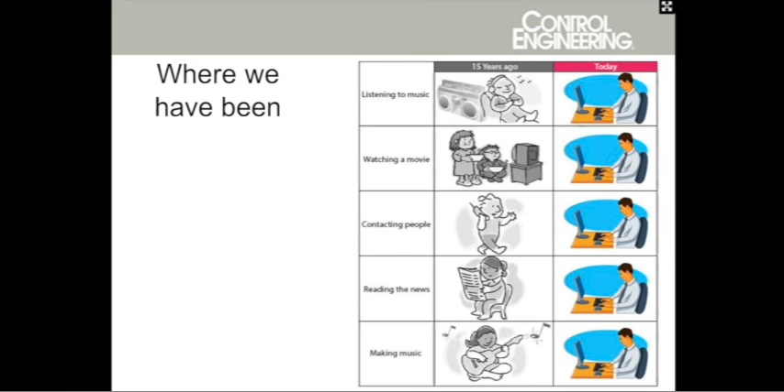Contacting people has changed. Skype is the obvious example. We depend on the internet. Reading the news, our cities' newspapers have completely disappeared because people read all of their news on the internet. Obviously, there have been changes there as well, and even in making music, not just listening to music.

But moving to the next slide, I'm here to tell you that there have been some markets where the internet has had no effect whatsoever. Early in my career, I worked as an expert systems developer, building artificial intelligence systems to automatically debug various broken systems. And this was one of the biggest projects I ever worked on in those days.

It's a Modicon 584 you're looking at. Modicon was a company that made programmable logic controllers, or PLCs. PLCs are used to drive discrete manufacturing processes. Our example was a General Motors plant that made brake linings in Michigan. Modicon doesn't exist anymore—it's been sold, sold several times, and is now part of the French company Schneider Electric.

The interesting thing is the way you used it in 1980, shown in the diagram next to the steel-looking Modicon 584 case on the left. That's a ladder diagram, and it hasn't changed—that's how you do it 35 years later. The machine looks different, with plastic sides now instead of metal, but you program it the same way. There have been changes in computing technology in 35 years, but not many changes in that box or in how you use a PLC to drive a discrete manufacturing line.

More dangerously, in 1980 if you wanted to take information from a PLC and connect it to your information systems—connecting operational systems to information systems—you typically had to print it out, carry it across the factory floor, and type it back in. In those days we called those systems manufacturing resource planning systems. Today we call them enterprise resource planning systems, like those you get from SAP, Oracle, Microsoft, and so on.

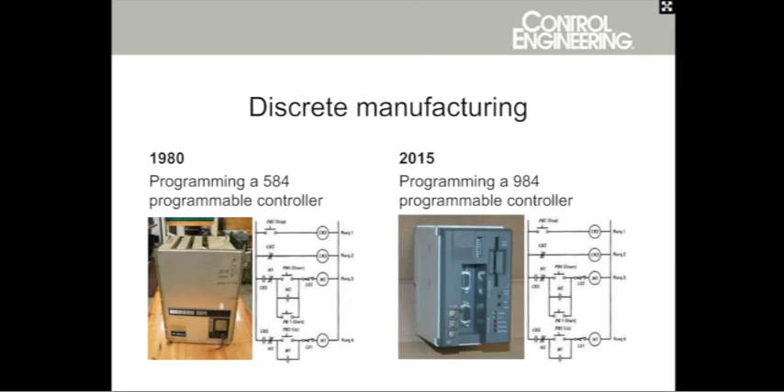Let me give you another example: energy management. In 1950, energy grids were designed with the assumption that there were tens or hundreds of millions of energy users, but only a handful—dozens at most—of power generators. You didn't need to pass information on the grid itself because information was all one-way anyway, so what information could you possibly pass?

Obviously, energy grids need to change. The three grids in the United States—East, West, and Texas—have basically not changed; they still don't pass information. Yet the way we generate electricity has changed tremendously. We generate power on rooftops, from aeolic systems (wind generators), from thermal generators near volcanoes and earthquakes, and from tidal generators along the coast. But those sources don't have the consistent output of typical nuclear, coal, or gas generators, so we have to change the grids to deal with that—but we haven't.

There have been lots of experiments to build microgrids, but it hasn't happened yet. Worse, the information we need to pass around the energy grid to make those changes live doesn't exist on the grid itself.

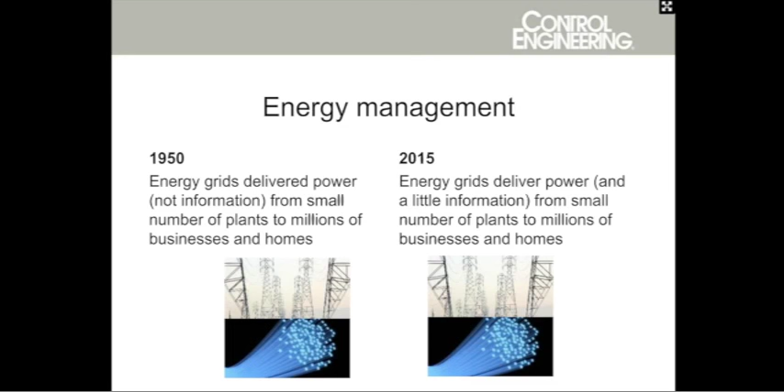Moving on to the next slide, in aviation—one of my favorite examples, because I'm a bit of an airplane nut.

Most of you may have heard that jet engines collect information while they're in flight. They can land with many terabytes of information that can be used to figure out whether they were performing at peak performance, whether they can be made more efficient, how much fuel they use, whether there's a bent fan blade in the second stage compressor, all sorts of information.

You'd think that since every airport in the world has Wi-Fi, the airplane would simply connect to Wi-Fi after landing, upload the engine information. That would go directly to the engine manufacturer, whether it's Avic or Rolls-Royce or Pratt & Whitney or General Electric or CFM or whomever. They would then benchmark that data, big data, against the use of that engine on that wing, on that type of airplane over the last 40 years, and say, you know what, this engine's about to fail, or maybe we can make it more efficient if we go replace one fan blade, or maybe we need to change the fuel mix. In fact, none of that happens.

Although there have been instrumented engines since 1950, still here in 2015, if you want to get that instrumentation information off the engine after the plane has landed, somebody's got to stick a USB key or a cable, more likely a cable, into the engine, download the data, look at it maybe at the end of the shift and see whether some of it ought to be sent up to the jet engine manufacturer. The engine manufacturer, perhaps at the end of the week, might run against benchmarks and say, oh my God, we better go find N5227 because it's about to fall out of the sky. 65 years, no change.

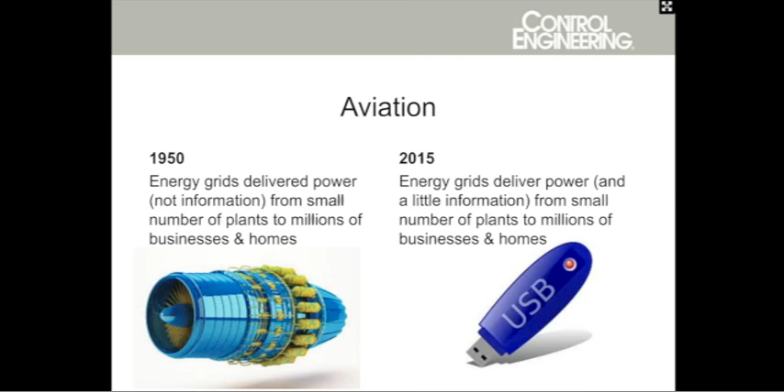Obviously, there are some changes we can make here. Moving on to the next slide, I see this as a transition very much like the last two revolutions.

In the late 18th century, we had the Industrial Revolution. The Industrial Revolution featured the move from human brawn to machine brawn. There was, of course, a social disruption that came with that, as people were kicked off the looms and replaced with steam-driven looms, and then later internal combustion engines, and then later electric engines. That's what led to the Luddite movement, especially in the textile business. People who had been cast out of their jobs or would soon be cast out of their jobs, destroying those new electric looms and complaining about it.

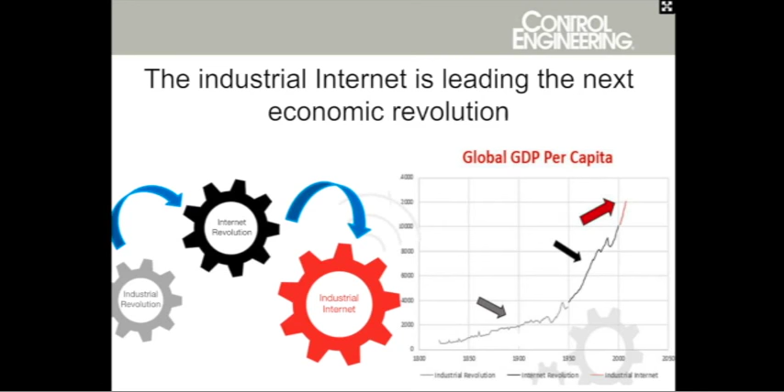What we're specifically looking at is disruptive technologies to lead transformational change. There will be social disruptions. Disruptions that cause transformational change cause disruptions in the way societies are organized. Clearly, we're going to see, for example, in a world of self-driving cars, especially when the self-driving cars talk to the roadbed and talk to each other, we're going to see a world in which taxi drivers need to find a new job. That's what we mean by disruptive.

That kind of disruption makes changes that change the world. But that's our job, is to find those transformational changes and make sure that we can make those transformational changes without destroying our own industrial basis.

In the next slide, we map out the difference between what we call the industrial Internet and what we call consumer IoT. So the Internet of Things is a basically simple idea. It's the idea that we take information from thousands, tens of thousands, potentially even millions of sensors worldwide. We integrate that information and we run it through big data. That is, we do predictive real-time analytics on that data and see when something can be made more efficient. And we take that back out either to human beings or, ignoring human beings completely, go directly to actuators positioned around engines or power generators or anything else that's manufactured.

So we're not talking about Fitbits, we're not talking about shopping carts, we're not talking about self-driving cars. While those are important markets, our focus at the Industrial Internet Consortium and what we call the Industrial Internet of Things is in transportation, it's in manufacturing, it's in electric power generation, distribution, and transmission, it's in oil and gas exploration, distribution, and so forth.

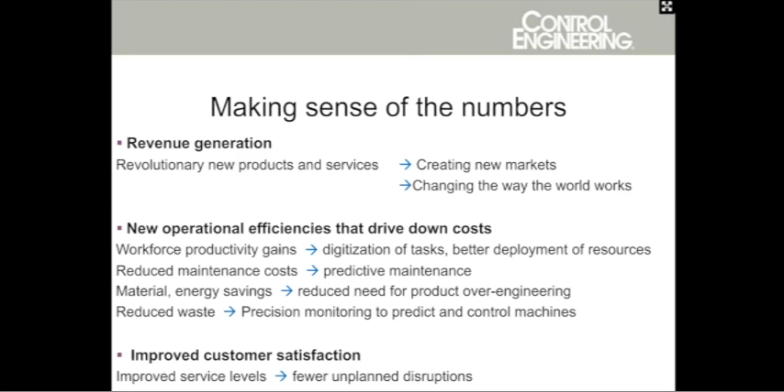So how do we get to this beautiful world? I hate presentations in which they say the future is so bright we're going to have to wear sunglasses. So I won't say that. But I will say, to get to that future where we have products that no longer fail, we need to have all these different players, as I show in the next slide.

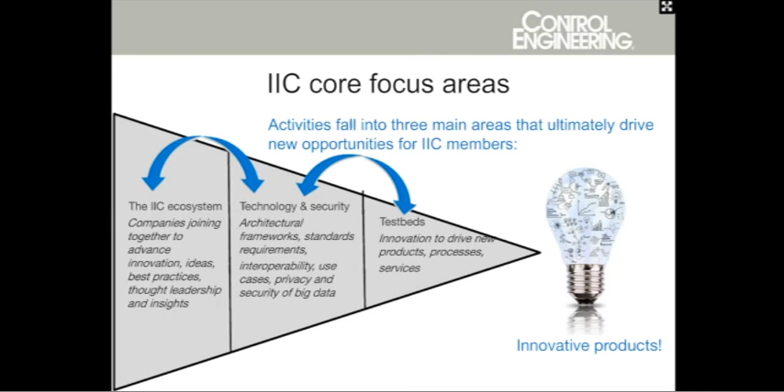As you see in the IIC core focus area slide, the net result is, we hope, and we're pretty sure we're going to get to innovative products. In fact, our first test bed has already had some positive results.

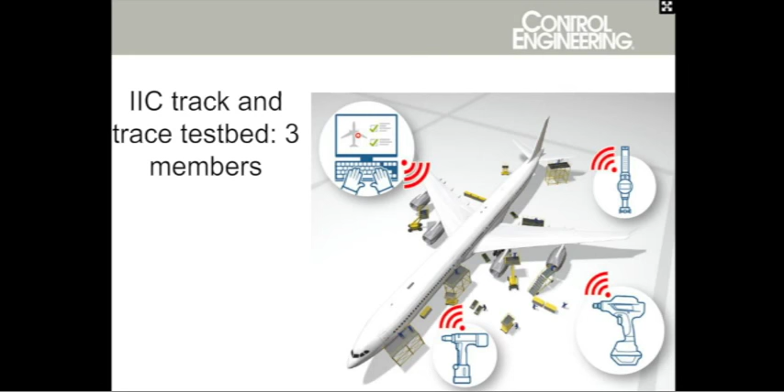In the next slide, you see the IIC track and trace test bed. 3 primary companies have driven that, especially a German manufacturing company, an American connectivity equipment maker, and a large Indian systems integrator. Built a solution which we call track and trace. It's quote, only a demonstrator, unquote, but as I say, we've already had some positive results. Moving on to the next slide, the IIC testbed track and trace.

The idea of this track and trace testbed was quite straightforward. If you can track all of the tools, people, parts, and inventory flowing through a manufacturing site, you can make sure that site is much safer, that people are only using the tools they're supposed to be using and trained to use, to make sure the tool is being used on the right piece of inventory and with the right part, and that the bolts are tightened the right way.

But also you can make your factory floor more efficient because you know the flow of products, inventory, and work in progress flowing through the factory. So you can monitor and control quality and increase quality, and therefore increase customer satisfaction as well.

This two-phase project is actually coming to an end. The first phase is coming to an end today, and already there are results that have generated changes in the way manufacturing is done in some manufacturing sites. It's generated a large open source project that will be carried out by the Eclipse Foundation, a member of the Industrial Internet Consortium. It's also generated important requirements for new standards in how you manage devices in an industrial Internet of Things. Those standards are now being worked on at the Object Management Group.

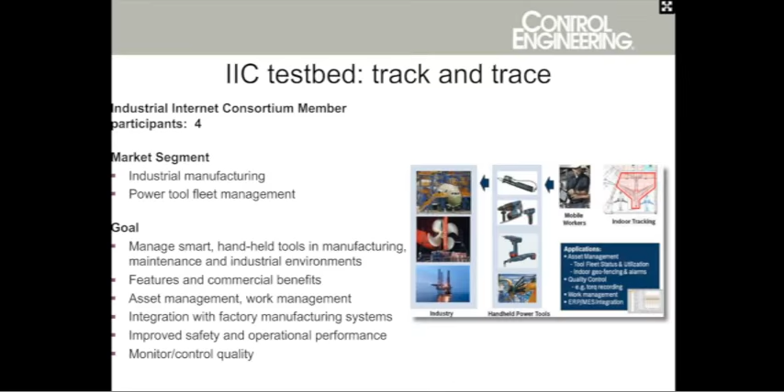We talked about power grids earlier in the presentation, so I won't belabor the point except to say if we had microgrids, we could deal with the varying inputs and outputs of power usage in cities, and the varying inputs of aeolic (wind) sources, thermal sources, tidal sources, and solar sources and so forth. We could share power between grids, move power around as necessary, and have a much more efficient power grid system.

This test bed is under development now. There's a test system being built in Southern California now. If that works, it will go full scale in a test bed in San Antonio, Texas. And there's much more information about both these test beds on the Industrial Internet Consortium website.

Why now? What's driving this is not anything particularly new in terms of technology, but low-cost, powerful technology, low-cost processing power, connected everything, and big data technology, both in terms of integrating large amounts of well-structured data, like engine data, and looking for nuggets of information in large amounts of unstructured data, the way Hadoop does, or Google for that matter. I think we're headed towards a lot smarter machines, not only in smarter manufacturing and smarter products, but a lot smarter data as well.

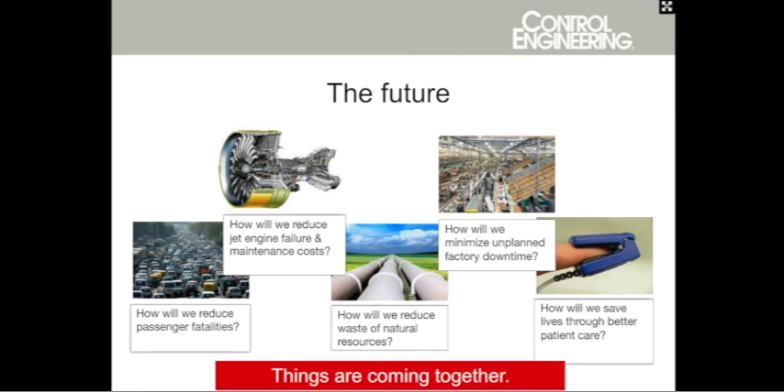I want to leave you with the message that things are coming together. We are getting to the point where we are building test beds. We're learning from those test beds. We are finding new leasing opportunities, new OpEx versus CapEx opportunities, new transformational business outcomes. And we're finding out that the industrial Internet of Things, the Internet of Things applied to industrial systems, is changing the world.

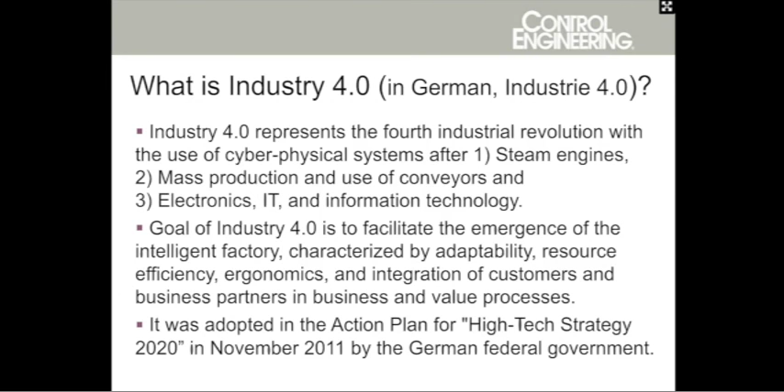There is a governing organization called Platform Industry 4.0, which aims to help those involved actively participate in the fourth industrial revolution, which is the source of the name, strengthen the German economy - it's a German-based organization - encourage development of standards, business and organizational models, and promote practical implementations with an exchange of technologies across industries. The organization also aims to ensure that Germany is a leading provider by 2020 of cyber-physical production systems.

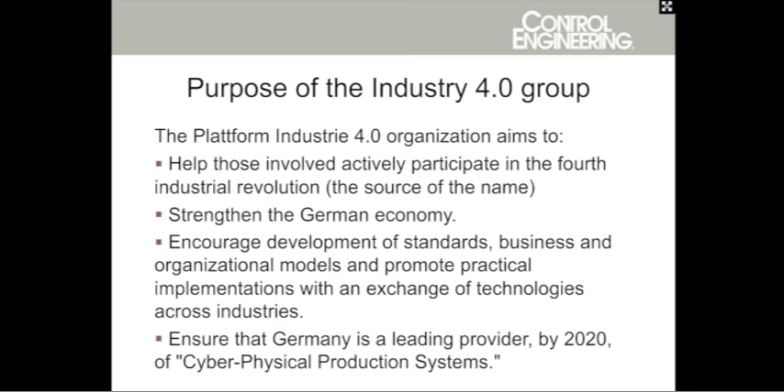I feel a need to pause and briefly explain why I'm giving this presentation, though I'm not associated with the Platform Industry 4.0 group. I met and invited a member of the Platform Industry 4.0 Steering Committee who agreed to speak for the webcast. We changed the date for the webcast, which created a conflict. The organization, which is in an expansion transition right now, was unable to provide a replacement.

Therefore, I used information from primary sources cited at the end of my slides to assemble this presentation, just as I would write an article for Control Engineering or Plant Engineering.

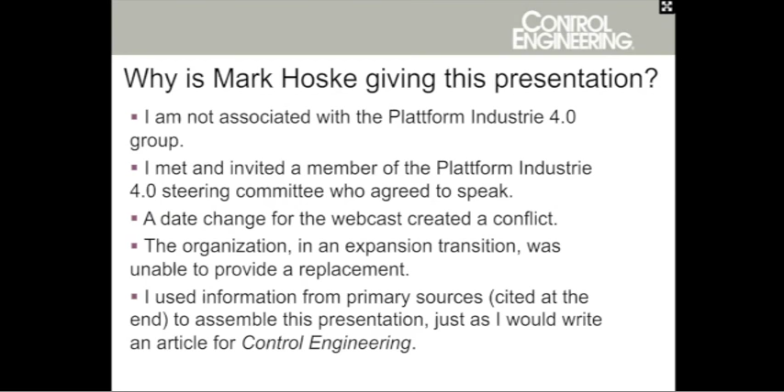Those involved with the Industry 4.0 organization include Bitkom, the German Federal Association for Information Technology, Telecommunications, and New Media, which has about 1,400 members. VDMA, a German federation representing about 3,100 companies. And ZVEI, the German Electrical and Electronic Manufacturers Association, representing the common interests of the electronics industry and related service companies in Germany, with about 1,600 companies involved.

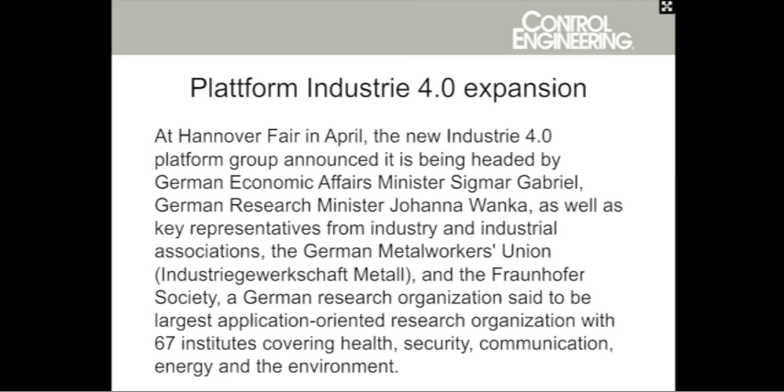At Hannover Fair in April, the new Industry 4.0 platform group was announced. It is being headed by the German Economic Affairs Minister and the German Research Minister, with key representatives from industry and industrial associations, the German Metal Workers Union, and the Fraunhofer Society, a German research organization with 67 institutes covering health, security, communication, energy, and the environment.

The Industry 4.0 platform has working groups covering the following topics: reference architecture, standardization, research and innovation, networked system security, the legal environment, work, and education and training.

Some basic concepts for Industry 4.0 are cyber-physical production systems, which use microcomputers as embedded systems where hardware and software components are integrated into a comprehensive system to implement specific features. The Internet, mobile computing, and cloud computing have the potential to enable greater productivity for industrial processes.

Cyber-physical production systems can be integrated into objects, products, and equipment to exchange information automatically as needed. Industrial processes are not organized centrally, but are decentralized and dynamic using this framework.

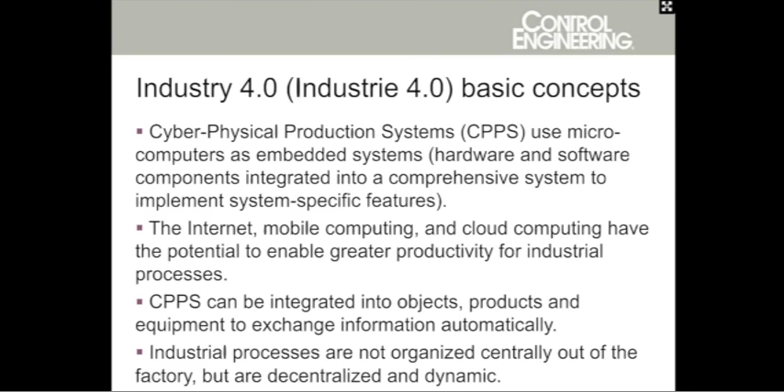Smart objects and machines are used in Industry 4.0. Products embed intelligence and inform machines what to do by using barcodes or radio frequency ID chips, RFID chips, with the appropriate information. Scanners and computers read data, transmit it, and ensure that machines operate properly. Smart objects communicate with each other, creating the Internet of Things and services. The physical world and the virtual world merge into cyber-physical systems.

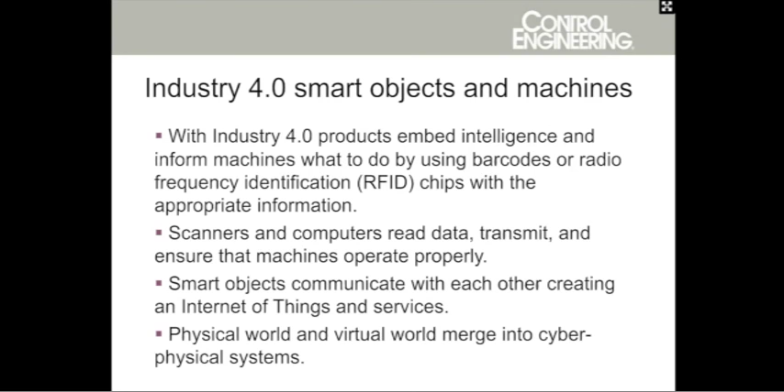In the networked factory, the Industry 4.0 framework enables production logic to change. Also, intelligent machines and products, storage systems, and resources are interlinked through the Internet along the value chain, including logistics, production, marketing, and services, throughout the whole value chain.

Here's an example of how Industry 4.0 can be applied. In the automotive automation area, car components collect data about their condition and indicate when a replacement is needed before failure occurs. The product independently sends a message to the manufacturer that replacement is necessary. The order contains detailed information on vehicle types, what is needed, and where components should be sent for repair.

The factory processes the order. Machines automatically configure themselves so that the right part is made and sent to the correct location at the right time for the repair to occur.

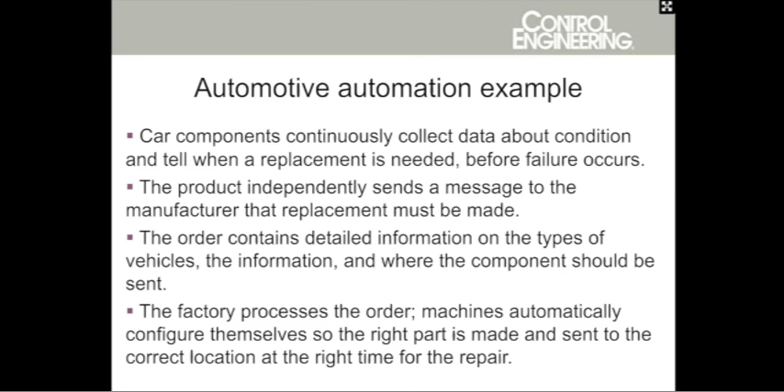Industry 4.0 offers benefits that can be grouped into 5 categories: competitiveness, flexibility, individual or customized production, innovation, and new work capabilities. I'll give some details on each, provided by the organization.

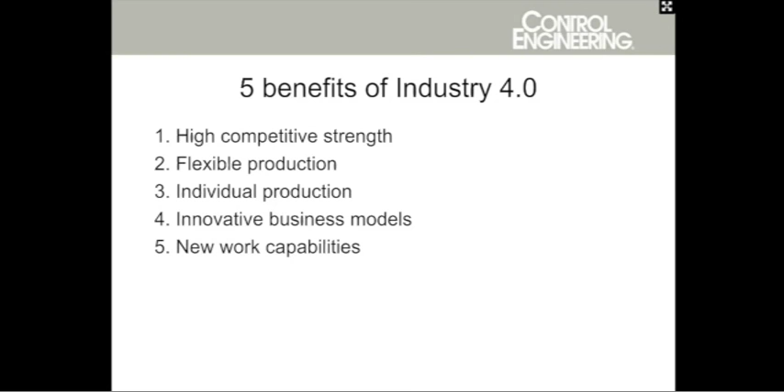First benefit is competitiveness. Germany, the organization says, is said to have an internationally leading manufacturing base, strong in the field of embedded systems. That is enhanced with active support of the transition to Industry 4.0, networking of products and equipment, and the efficiency of manufacturing companies helps promote global competition.

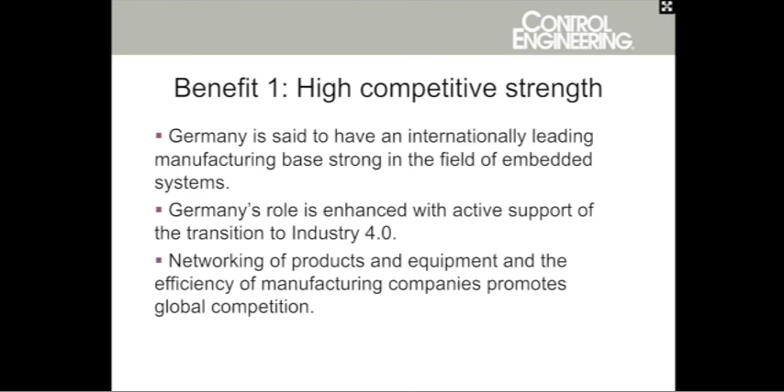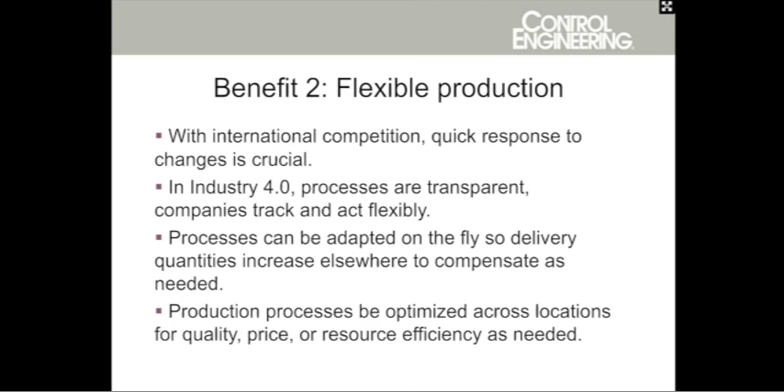Benefit 2 is flexible production, which helps with international competition. In Industry 4.0, processes are transparent as companies track goods and processes and act flexibly. Processes can be adapted in real time so that production matches delivery quantities as needed. Production processes can be optimized across locations for quality, price, or resource efficiency as needed.

The third benefit of Industry 4.0 is individual or customized production, which means production of single pieces and small quantities can be profitable. Goods can be specified on certain machines sooner as needed using information technology. A product might be painted blue or red on the same machine without any difficult reprogramming. Production reacts quickly to individual customer-specific requirements.

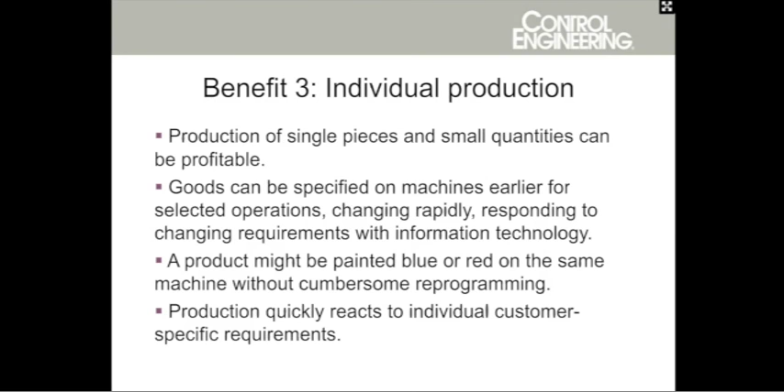The fourth benefit of the fourth industrial revolution enables new business models and services. Intelligent objects collect diverse data, which can be used for innovative services. Startups to medium-sized enterprises with ideas can benefit from big data and more quickly establish themselves with services to offer in their marketplaces.

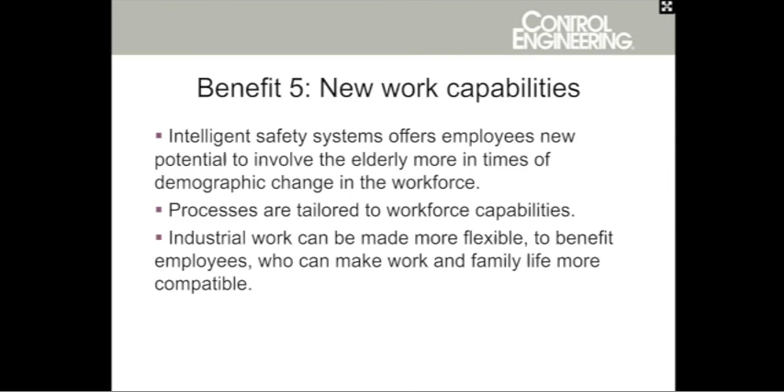Benefit 5: Industry 4.0 will also help with extreme demographic changes affecting manufacturing. Processes will be tailored to workforce capabilities. Industrial work can be made more flexible to benefit employees, who then can make work and family life more compatible.

Examples and advice for implementation. Industry 4.0 can use manufacturing information technologies to create a resilient factory so that production lines and processing stations can quickly adapt to a changing market product mix to optimize capacity.

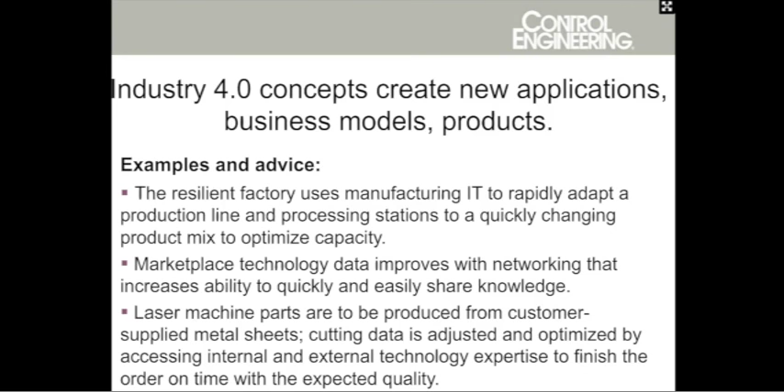Industry 4.0 can improve networking to increase the ability to quickly and easily share knowledge. It can also adjust and optimize part production and processes, such as cutting metal parts with lasers, by quickly accessing internal and external technology expertise to finish the order on time with the expected quality.

More examples might include intelligent maintenance. Costs can fall as predictive maintenance significantly reduces unplanned shutdowns.

Greater use of networks in production helps mass customization, adapting to turbulent markets with flexible production processes. Adaptive logistics: networked production can increase reliable production processes for low-friction, error-free, value-added processes. Even as demands for piece number and variant flexibility increase, bottlenecks and errors can be avoided.

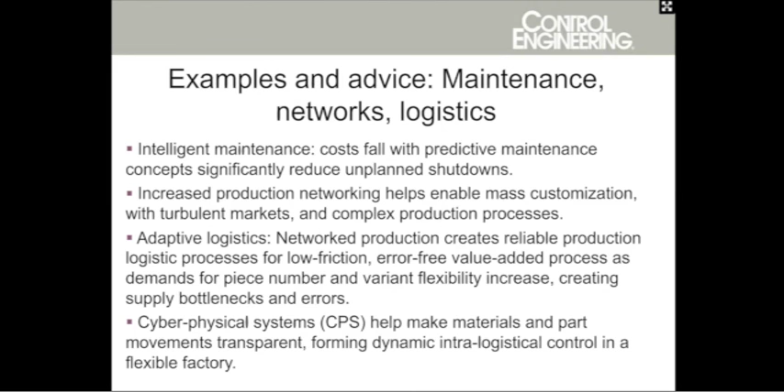Cyber-physical systems can make materials and part movements transparent, forming dynamic, intra-logistical controls in a flexible factory.

Integrated engineering: as customers demand both functionality and changes, classic production needs rethinking. By integrating customers in development, planning, and value-adding activities, greater transparency and tighter synchronization results for all participants.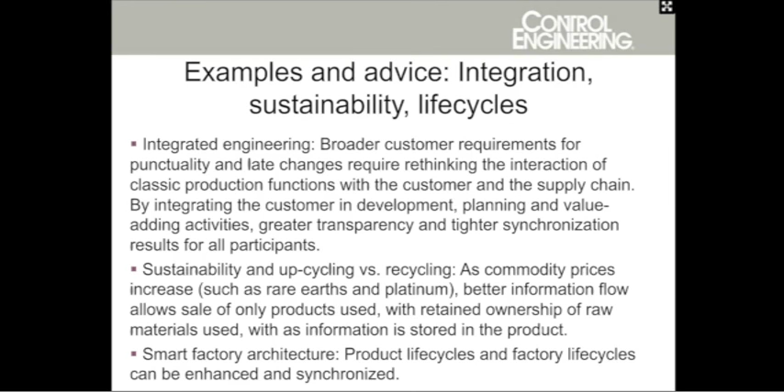Sustainability and upcycling versus recycling: as commodity prices increase, better information flow allows the sale of only products used, with retained ownership of raw materials used and appropriate information stored in the product. Smart factory architecture: product life cycles and factory life cycles can be enhanced and synchronized.

Beyond any specific technologies, Industry 4.0 creates value for customers, and none of this happens without cybersecurity. While distributed systems have been around for a long time, significant cybersecurity investments are needed for more real-time information flow and related value. This concludes the information from Platform Industry 4.0.

Now I have 2 slides with Control Engineering research results prepared just for this webcast. As part of the upcoming Control Engineering Research Report on System Integration, we asked subscribers what part of the Industrial Internet of Things technology framework is useful.